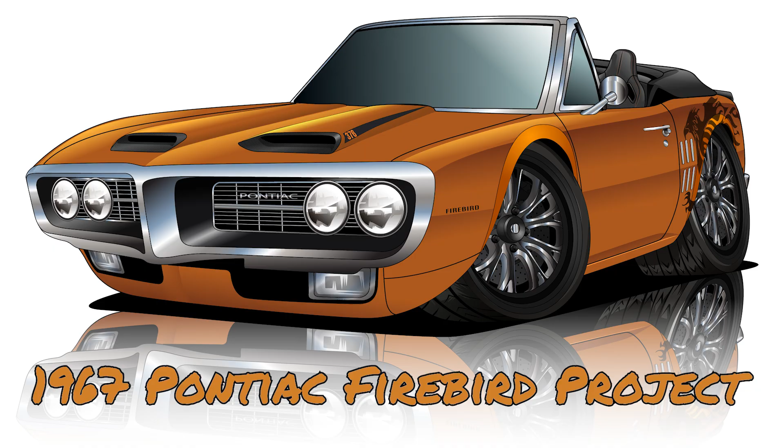Okay, gonna do some computering up in here today. So, one of the last things I need to do is kind of incorporate my ram air system. So the tubes are in place, the scoops are obviously there. Now I've got to tie these 2 points back to the throttle body. How might you do that?

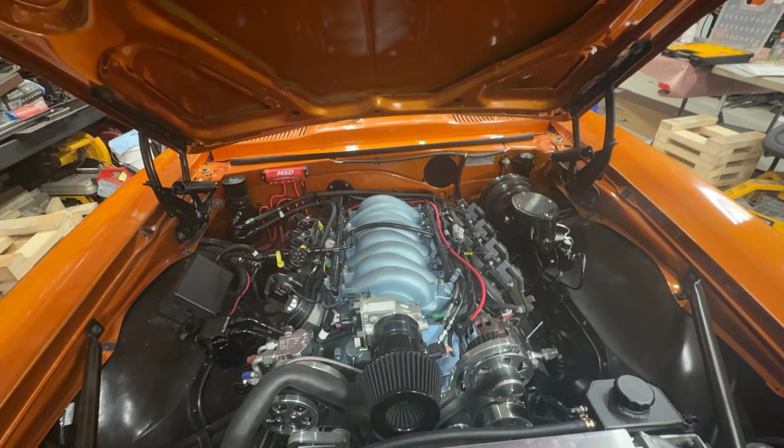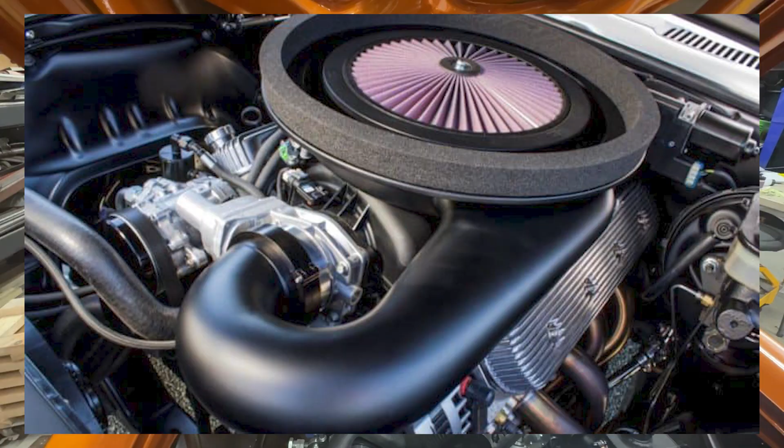Well, I've seen a number of different solutions. I've seen some that take it down, cut these off right here, pull it down into a box in the front. Those are all pretty cool. I saw this, and near as I can tell, this was a project done by Hot Rod Garage, and this is exactly what I'm looking to do. So I'm going to try to implement something very similar. Of course, you can't buy this. Doesn't seem to be available anywhere. So I am going to go ahead and build it.

Now, the first thing I need to do, however, and try to get my head around this, is I've got to scan the bottom of this hood to get this into CAD. And I am going to try to do that now, get this kind of lined up. Then I can calculate and figure out how high my pan will be over the motor, and I'll show you how I do that. But first things first, I'm going to try to get this scanned and get this into CAD, see what happens.

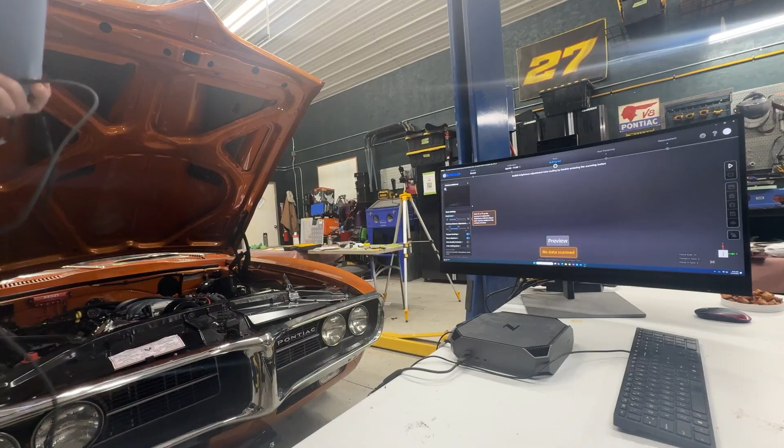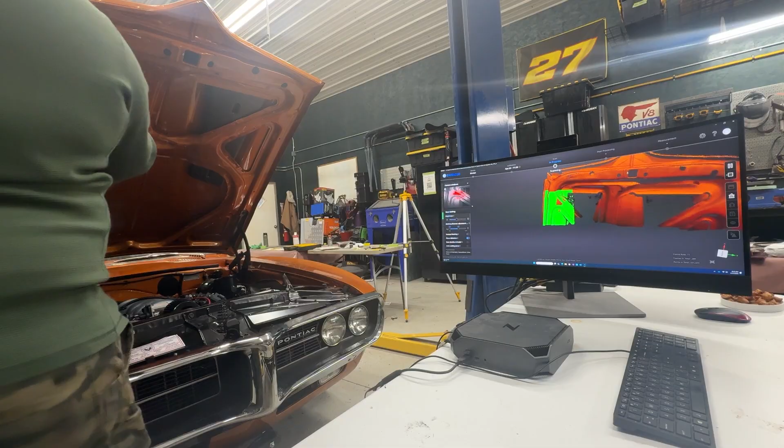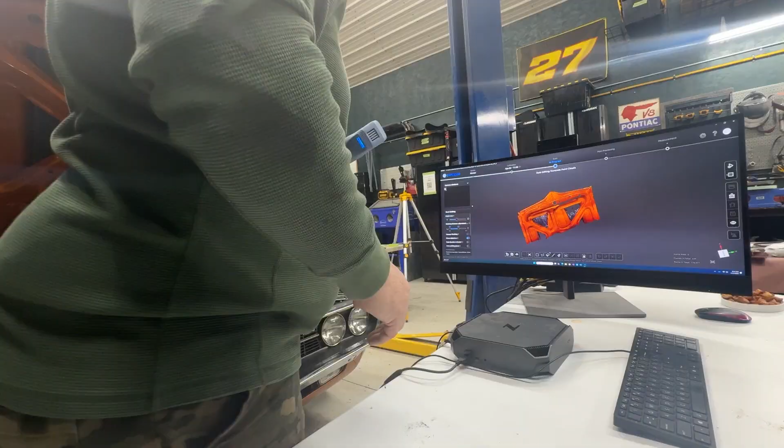Okay, let's give this a shot. When it's green, it's happy. I think if I hit this button again, I'm scanning. Too close. Come on. Lost it. Okay. Close. I'm going to start again. All right, that might be as good as I'm going to get it.

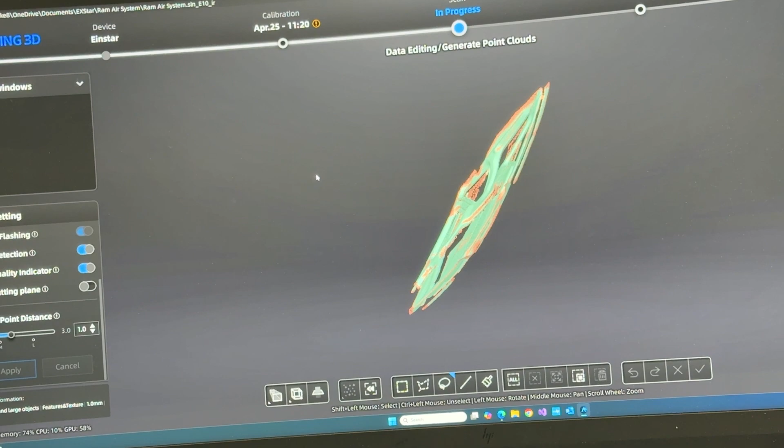I hit another scan to pick up these bottom screw holes here and here, because they're kind of in a weird place. So I think with that, I can do what I need to do. Except I want to get rid of that little, sometimes it puts things out in space like this stuff right here, but we'll clean that up. But first of all, pretty happy with that. That's okay-ish. Not the best scan ever, but it's a really complicated piece and very hard to hold everything flat to it.

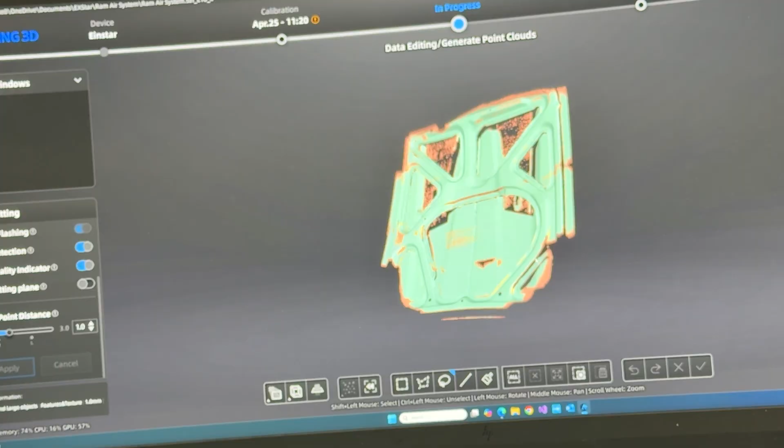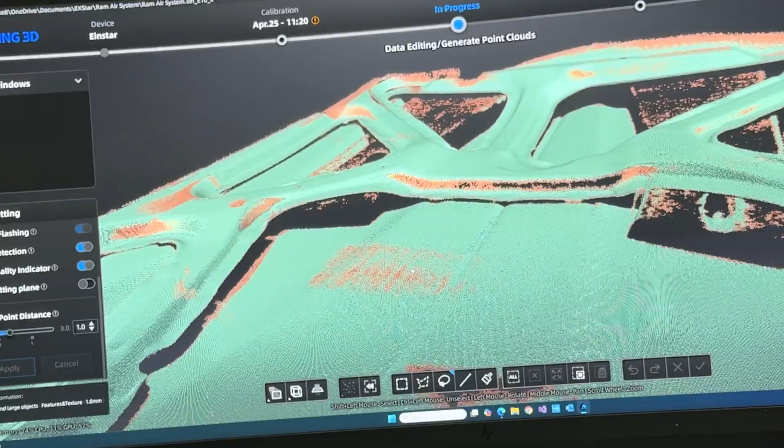So, next step, yeah, you can even see the glue that's adhering the hood to the frame. That's pretty neat. And I've got my heights right. I think it does show me that this is going to have to be cut. But, okay, I'm going to generate a point cloud now and go with that. Pretty good size scan. Not the biggest I've done by far, but this might take a minute. I've got an atrocious amount of memory in this machine, so it should handle it.

Come on, baby. You can do it. You can do it. 86. Uh-oh. That's not good. Nope, 96. Okay, we're back in business.

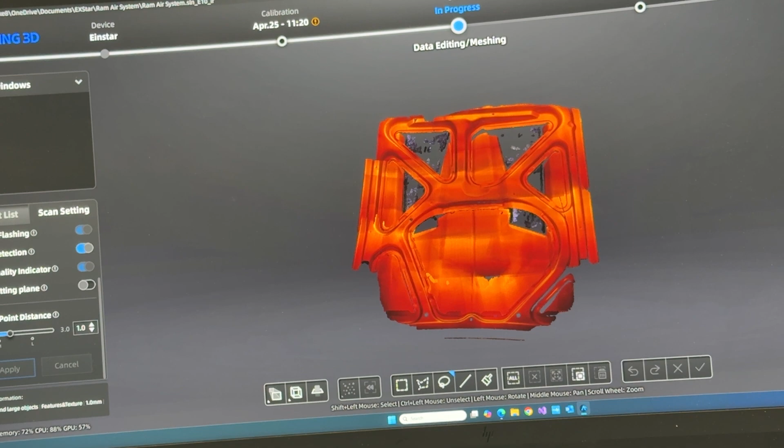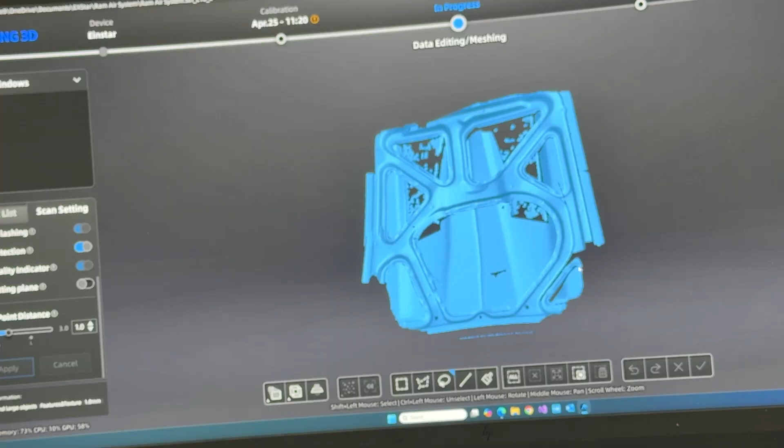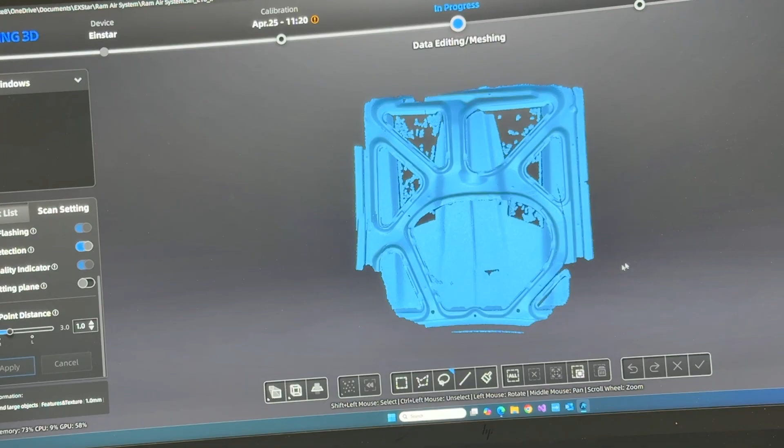Okay. It even tries to throw the color in there, which is kind of unnecessary. There we go. That's a little easier to see. It struggles with black. It really does. But that's okay. So I've got a point cloud now. Gonna save it. I'm gonna call it, oops, cancel. Let's save it. We're gonna call it Hood Scan 2. All right. Okay, let me see if I can generate the other model and I'll get this into CAD.

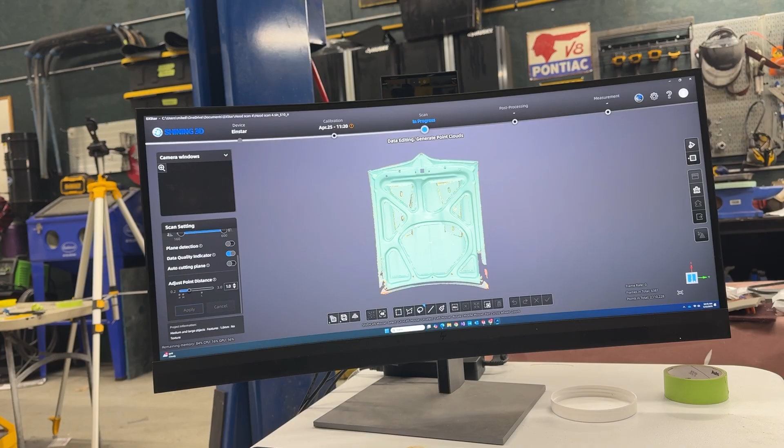All right, I had to rescan that. I went much slower watching the screen as I went, and I was able to get a much better scan of the underside of the hood. Except around the hinges, but we don't care about that. So that's a pretty solid scan. I'm pretty happy with that. What I'm trying to do, however, is figure out how I can verify my planes here.

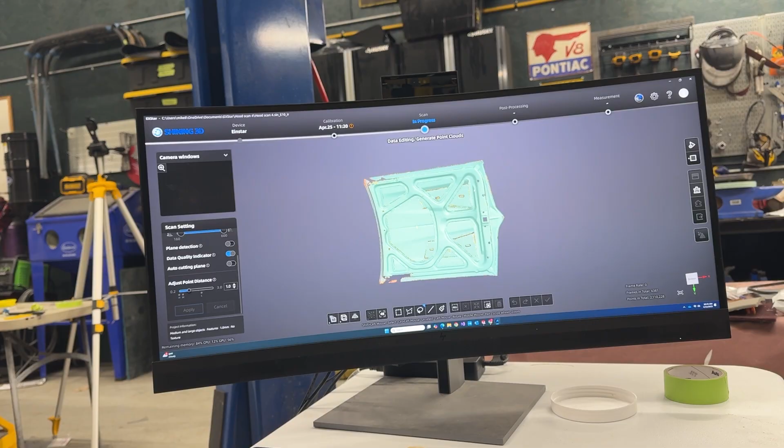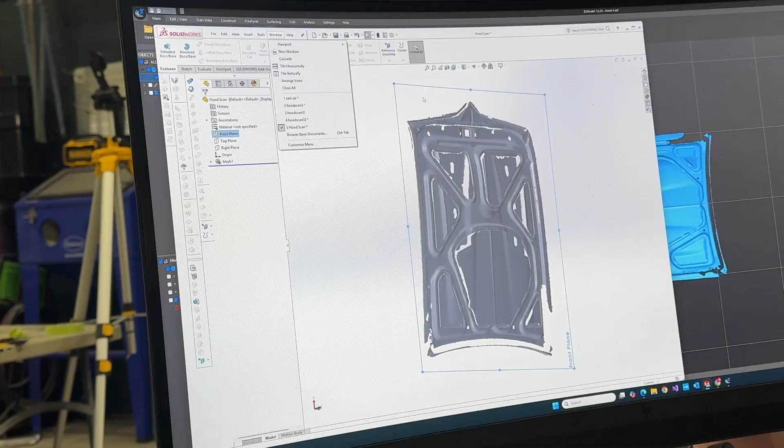Okay, that took a minute, but I finally got this into CAD on a plane that makes somewhat sense. Excuse me. So now I'm going to take that and work in the pieces that I need to use. And let me grab those and I'll bring you right back.

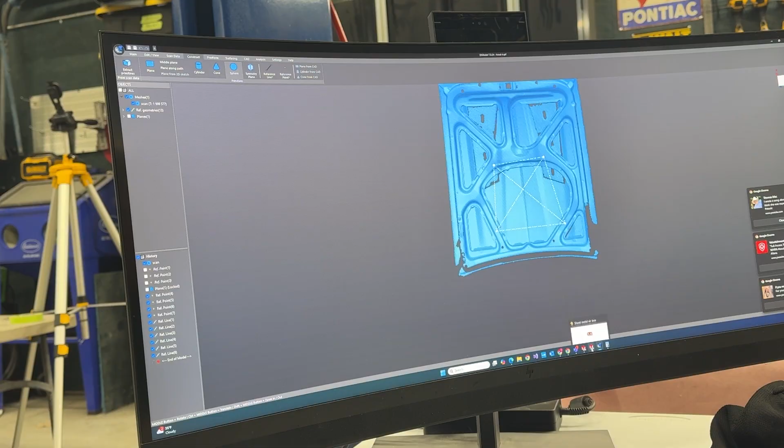Okay, got updates. So I found this other tool that allowed me to take my scan and take some measurements, do all that, and put it on the proper plane. Great, finally. I've been all day at this. Then I was able to bring it into SolidWorks and got it on the plane. Everything looks good. I just threw some pins in here to simulate and easily display where the bolt holes are for the air pan, the hood pan.

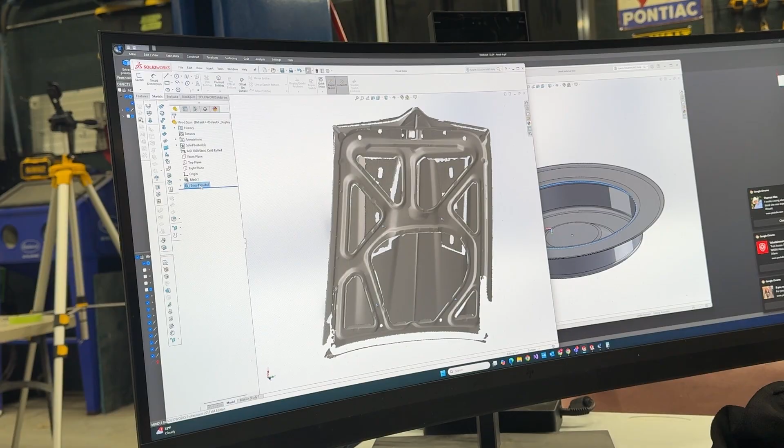And it's a weird shape. I mean, nothing is square. Everything is this big oblong mess in here. So I've been trying to figure out how best to do this. And near as I can tell, this is where I'm at. So brought that over to a different assembly. And of course, when you bring it into assembly, you start to lose detail. But it'll start to become clearer here in a second.

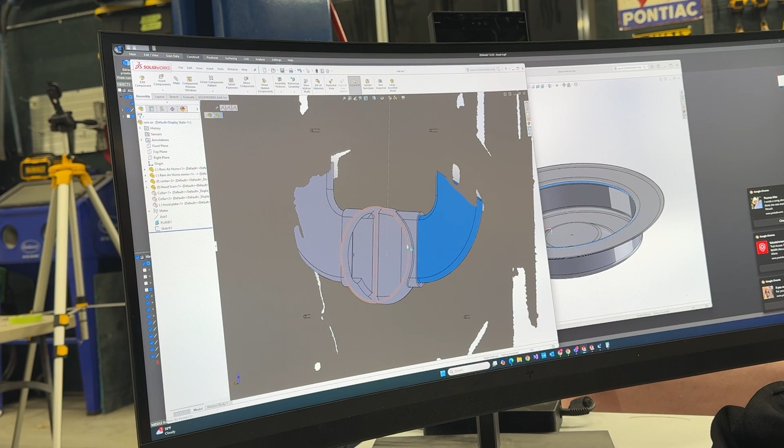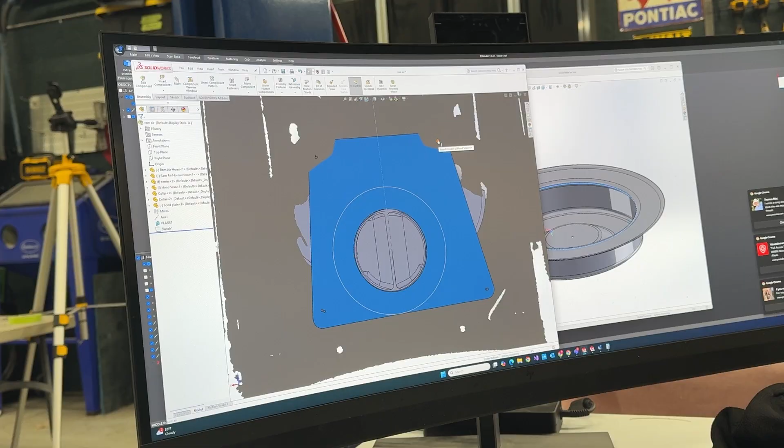So I made these 3 parts, 3D printed them. And basically what they do is they take that hood scoop tube, run it down and deflect it straight down over something, okay? Now, the idea being that we're going to then, well, let me just throw these in. Then there's a plate that goes over that assembly and holds it all down, or up in this case. And you can see I've modeled up a plate and kind of simulated where my holes should be. I'm gonna need some adjustment there just to keep this tight. So I probably won't cut those holes to start with, but we'll see.

Anyway, so that's kind of what the assembly will look like on the bottom of the hood, all right? Now, under the hood, the assembly is going to look something like this. Let me get the other one out.

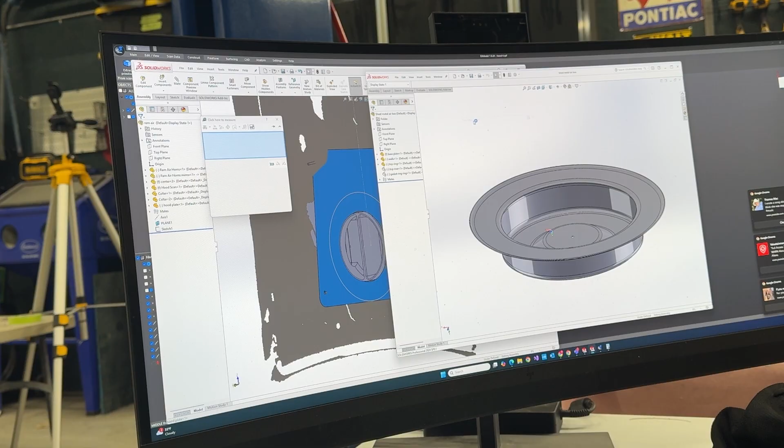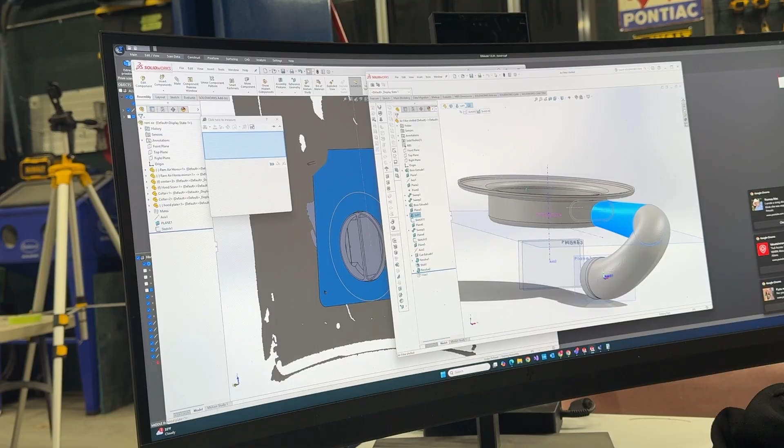So I've bought 4-inch elbows and straights to build this assembly out of aluminum. Then I get up into here and I'm going to have to build this airbox. The idea is this airbox will sit on top of the motor, connected back to the throttle body. Then I will probably fasten it down to the fuel rails, because there's some nice little tabs on the top of the fuel rails I could grab.

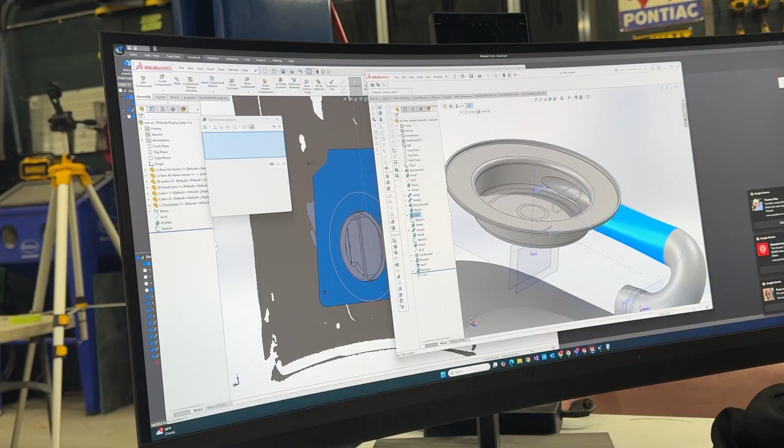But the idea being, I could take this, mount that down, then use this as the filter. So it's just a K&N air filter lid, but use this as the filter lid by sitting right down over that assembly. And then on the outer edge, there'll be a foam seal up to this plate.

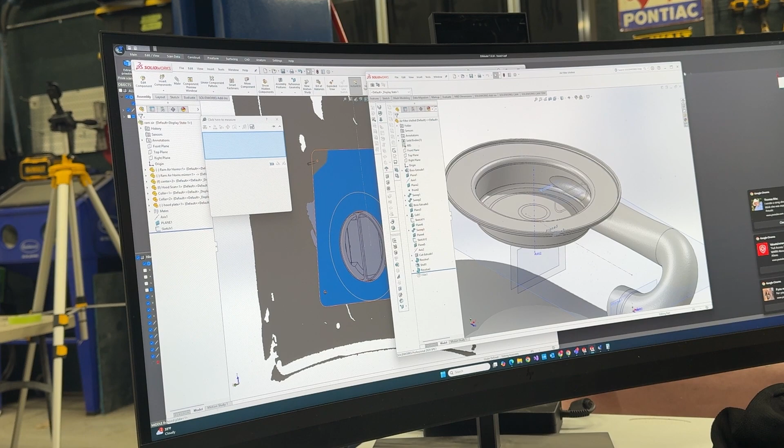There we go, sorry. Okay, so there'll be a foam seal that runs up around the outside of the air filter here that will pick up this plate up here. I'll want to bead roll some stuff into this plate, kind of make it a little less ugly. Not exactly sure how I'm going to fabricate this yet. This circle here represents the foam seal. We'll be out about that far. And unfortunately, the holes are way up here. Yeah, it's great.

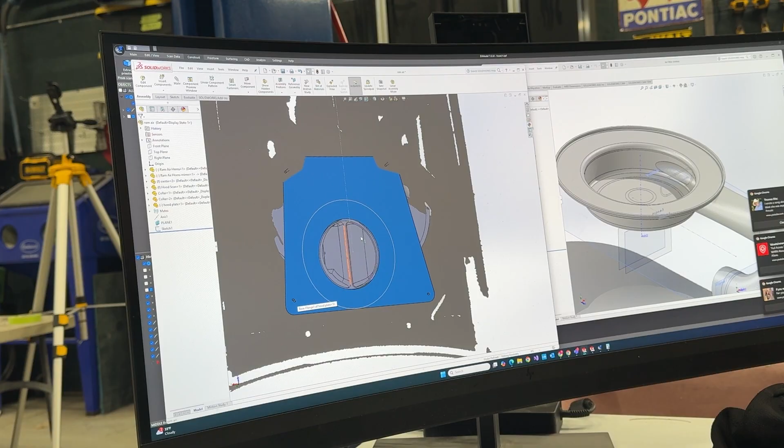So I'm not going to cut this plate until I get the air ram set up in the hood. But I can fabricate this plate, I can fabricate this box, get this ready to go. And I won't weld in this piece of tubing here until I can verify the exact location of this, just to be safe. I believe I have about an extra inch of clearance in here. Might not be that much in the end, but it's gonna be close. So that's kind of where I'm at with it.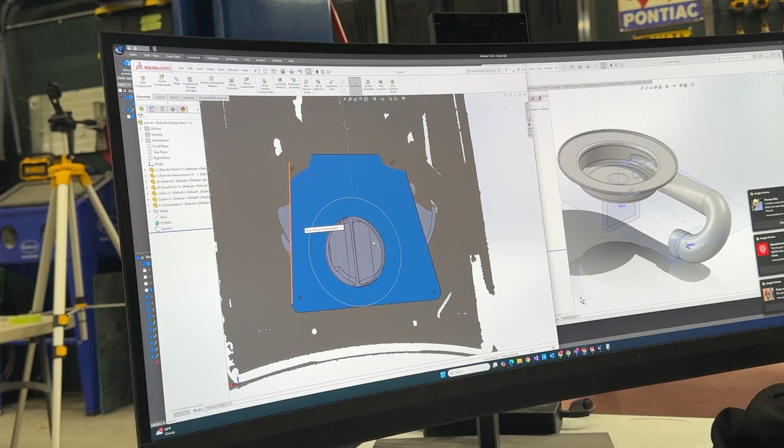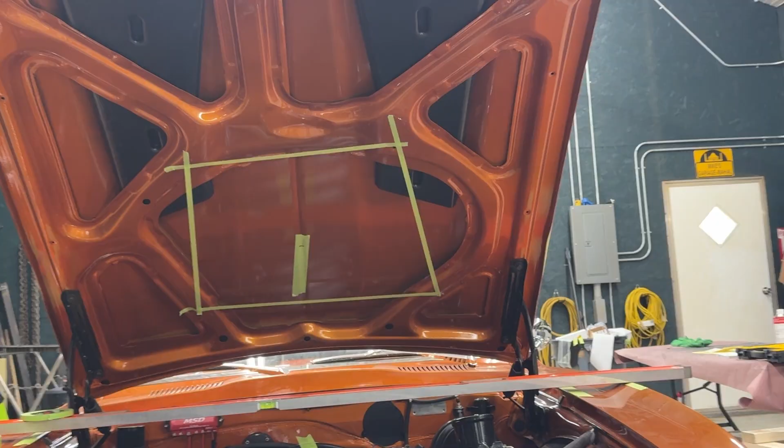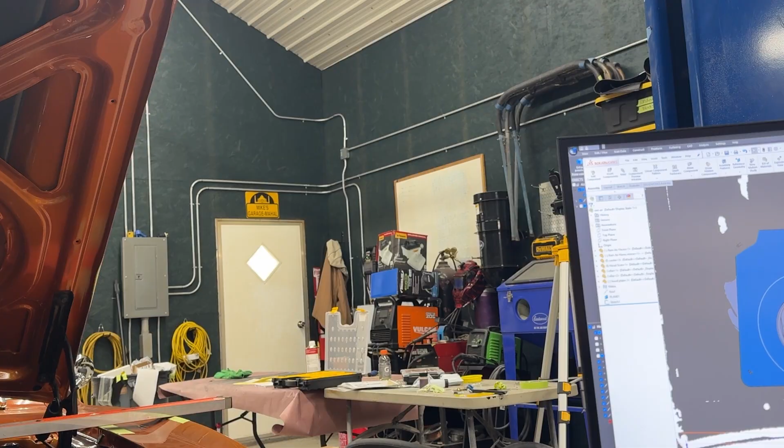I've done a number of calculations as far as how much clearance I have from the top of the intake to the top of the hood, and it's about 5.5 inches as it stands right now. So it's gonna be very close, but it'll all fit. I'll be able to work it in. So yeah, that's what I'm gonna do next.

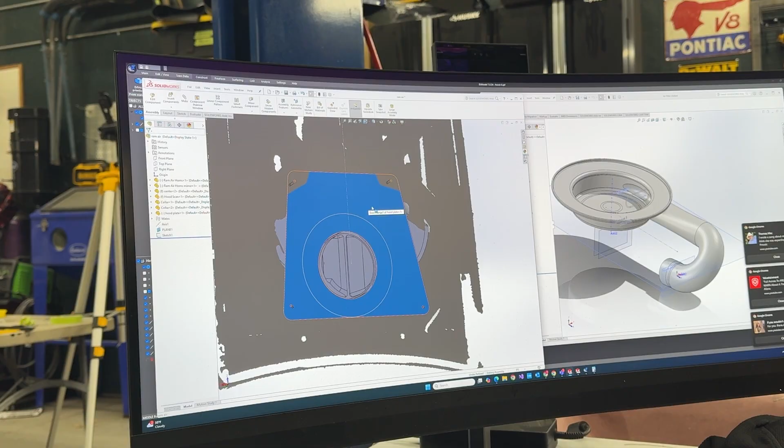I'm gonna look at this plate, see if I could do something to make that a little more appealing, less awkward. I wish there was some way to make it at least symmetrical under that hood, but there's just really not. I could try to fill that entire odd shape there under the tape, but that just seems a little silly. But either way, I'm gonna keep plugging at this, and I'll come up with a solution.

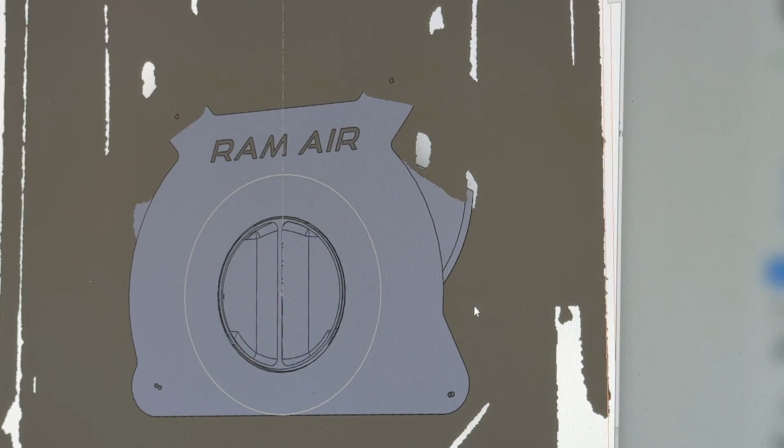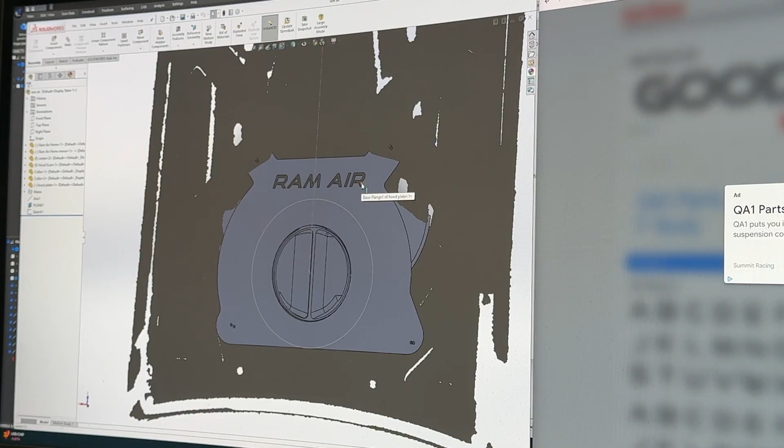Okay, so that's about as good as I can make that look. It's still wonky, but it'll do. So let me recap here. I'll probably roll some beads into this and make it a little more appealing, but I did cut in some lettering up here. I think it will help make it slightly less ugly. Anyway, let's just hide this for a sec.

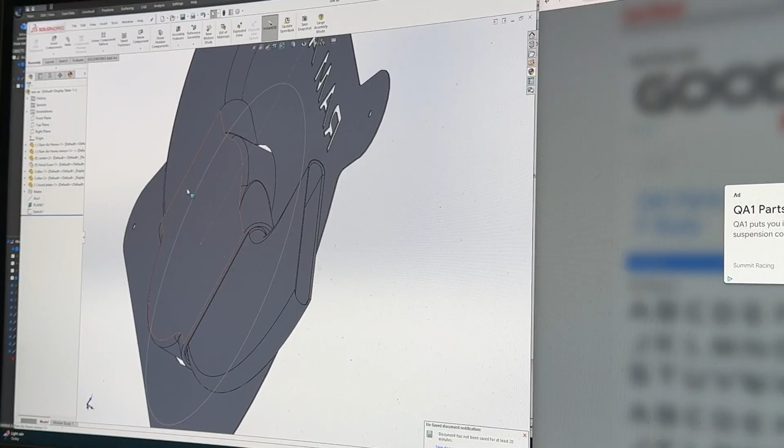And here are the component parts. I've got the two horns that come out of the tubes. I've got the center section that redirects the air down. And then I have the plate that holds it all up. And that all should work fine.

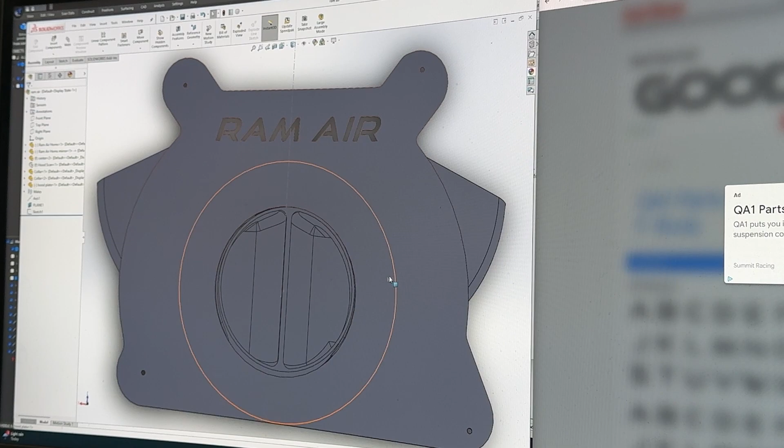If it doesn't, well, we'll regroup. Like I said, I'm gonna roll some beads in this or make some depressed areas or something just to kind of make it look a little more appealing, but that's where that stands. So after this, that's all fine. Then I'm gonna move over and start fabricating this next week.

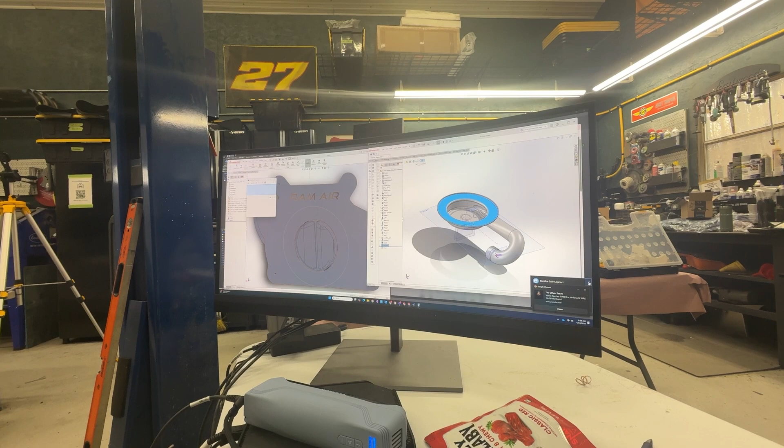Like I said, this is gonna take a few weeks to get this done, just because there's some pieces that the printing is still happening. But yeah, I'm in good shape. I bought some 4-inch aluminum tube to fabricate these elbows. I got a 180, I got a 90 and a straight section. I will build a plug to kind of seat into the end of it to get it squashed down to where I want it. But yeah, that should work nicely.

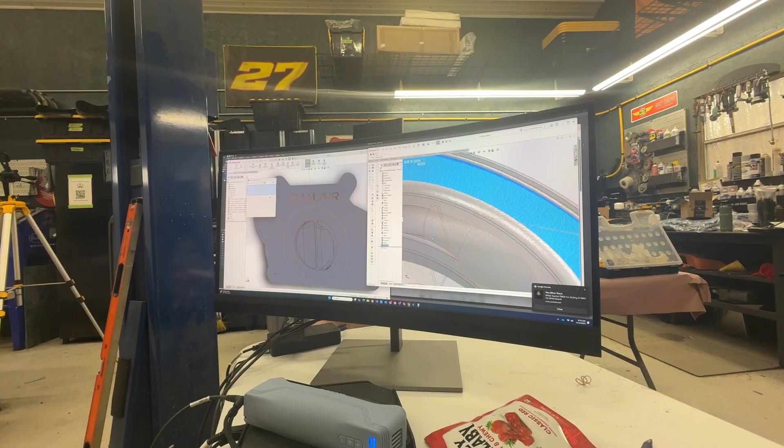Then I'll push it through, weld it up, and then cut it off internal to the pan. But first things first, I'm gonna start by building the pan next week. Should have some of that video available for you. We'll probably cut this ram air plate next week as well. Get some of that ready to go. And like I said, probably gonna have to get creative on how I locate these holes precisely, but we'll cross that bridge when we get to it.

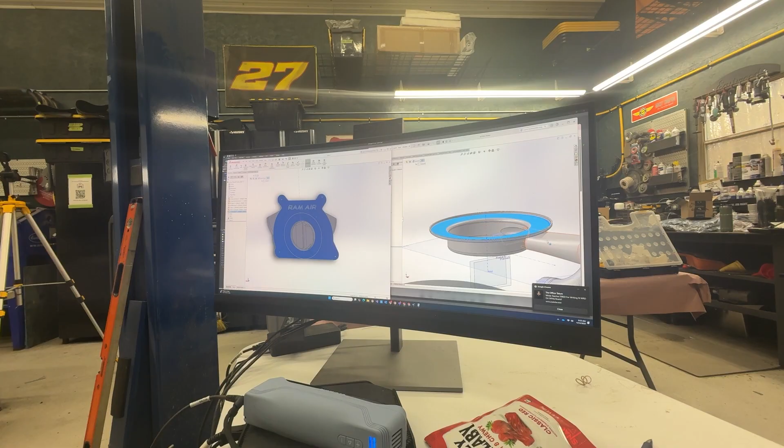So yeah, that pretty much wraps it up for the design phase. Again, I did all of this in SolidWorks. I have to then convert it into Fusion so I can cut it on the CNC. SolidWorks does not have a CNC G-code output for plasma cutters, near as I can tell. Maybe they do, maybe they don't, I don't know. I just use Fusion. Just tends to be a little easier for me. I shouldn't say that. If I had the CNC add-on for SolidWorks, I would definitely use it. But anyway, that's kind of how this is all laying out.

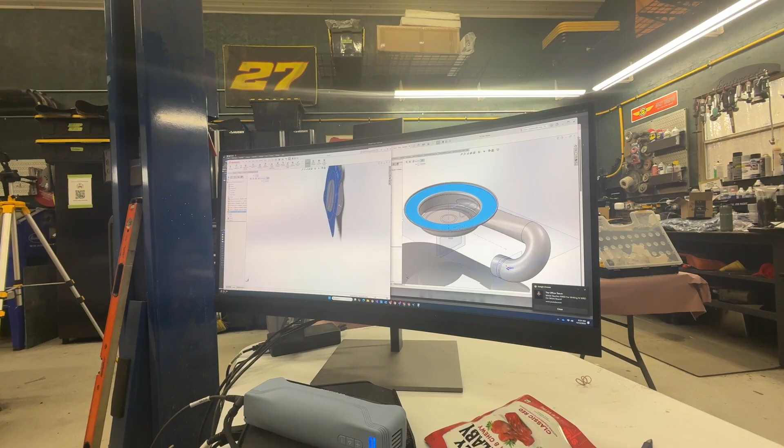I hope this helps somebody. Again, this wasn't a very exciting fabrication video, but at the end of the day, you got to plan for some of this stuff, and this is a good explanation for how I designed it. And again, I got a hold of the ends of the tubes with some little elbows here. I call them the horns, and I feed those into the center section. And in the center section, this is all 3D printed plastics. And in the center section, I redirect the air straight down.

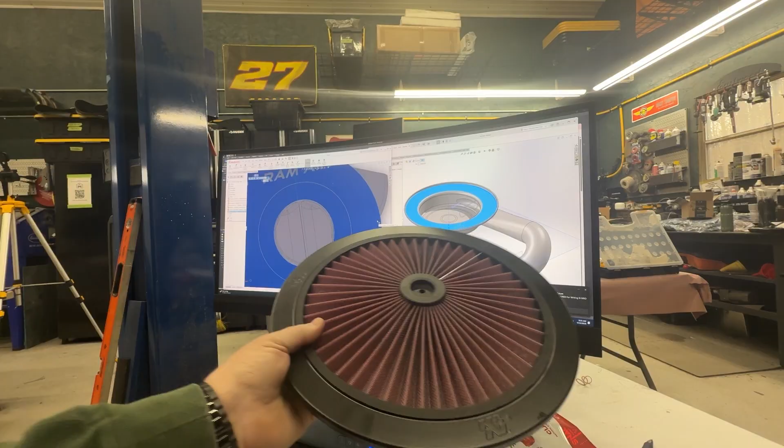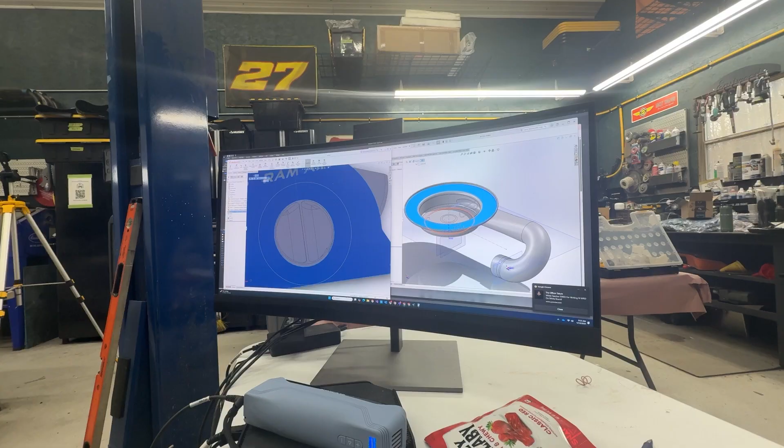On top of the pan that I'm going to build there is this filter. It's a K&N oiled filter. It's cleanable. This should work really good. And then around this filter, around this edge here, I will seal that up with some, there's a very thick Moroso air filter foam that will work quite nicely for that, I believe. So that's my plan.

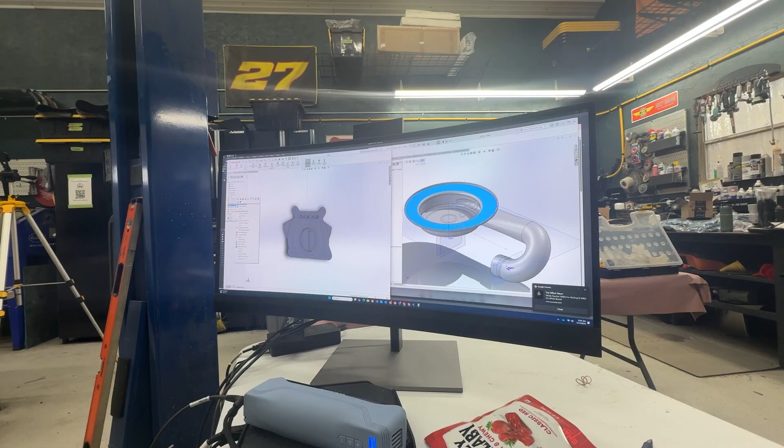I'm gonna wrap this video up here. Again, I spent a lot of time designing this. I got a lot of hours into it yesterday. Kind of ran into some tool difficulties with the scanner. It took me a little longer to get a good scan than I thought it would, but you know, if you just go slow and steady with the scanner, it works really nice. For some reason, my hood loses all definition when I bring it back in. SolidWorks gets a little finicky when parts are big like this. So I know it's not a perfect scan, but it has all my relative points.

And if you look at the way this fits on the hood right now, I can dog ear this up a little bit on these two ears and get up over that hump. So that's kind of the way I designed it. I might put a return here in the front just to kind of close up some of the gap that'll be right underneath this front edge. It's really hard to see with this, but there's a section here that would gap. So I might put a return edge on that just to make it nice, or I might just roll an edge. I don't know. We'll see. And I'll probably flare this up with a radius roller too right here at the horn.

So anyway, the fabrication will be more interesting, I promise, but at the end of the day, you gotta design this stuff before you can build it. If you just wing it, well, who knows what you're gonna get. You'll end up compromising. So I like to see how everything fits and looks before I do it. The underside of this hood is so odd. I don't know why Pontiac did that, or I'm sure Chevrolet did the same thing, but none of this stuff is uniform under here or symmetrical. It's just bizarre. So anyway, that'll wrap it up for this one.

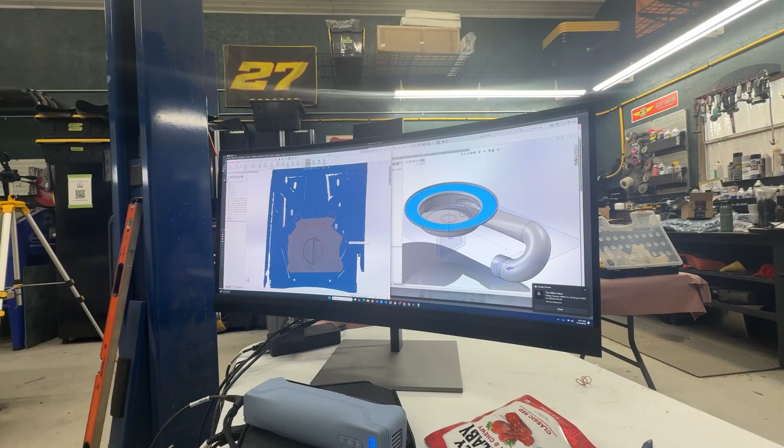I've got some other stuff I got to do today. Snow tires, got to take them off my son's car, and we've got a bunch of things to do. So I'm going to get this stuff put away and cleaned up and get ready to do that exercise.